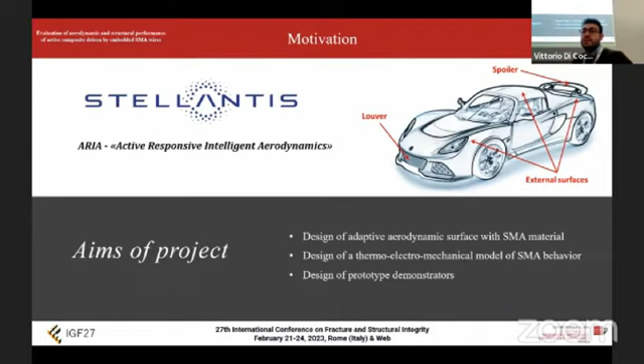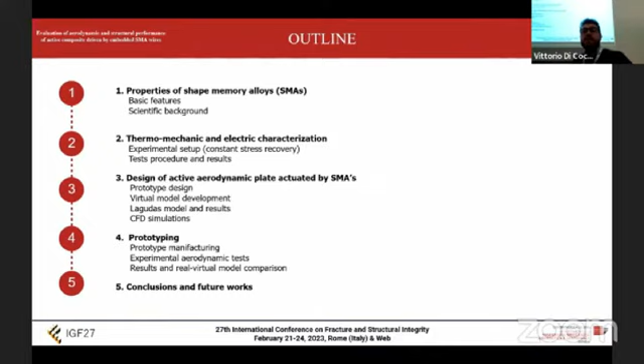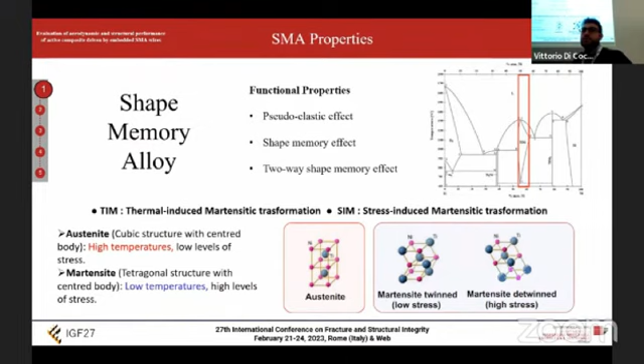In particular, we start talking about the SMA properties and our thermomechanical characterization, the design of our prototype, the test of this prototype, and our conclusion, of course. For the beginning, I want to talk about the functional properties of this particular material. In particular, we can talk about the pseudoelasticity or shape memory effect. We want to use the shape memory effect to realize our prototype, and this effect consists in the recovering of residual deformation preset on this material, in particular on this wire, through thermal activation.

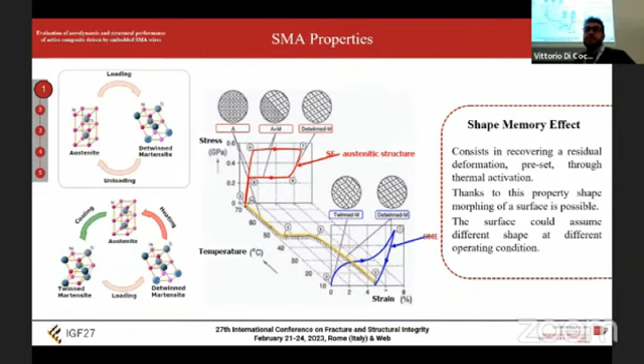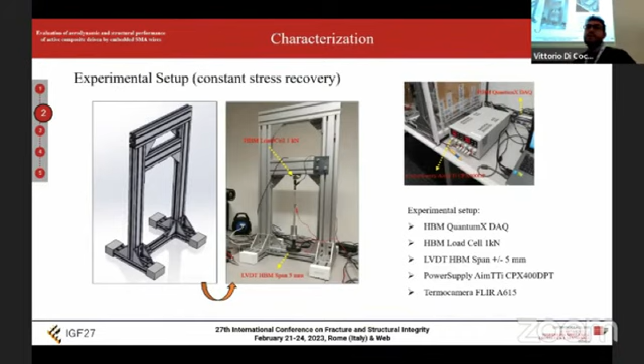As we can see on the graph, the properties of this material are very related to temperature and stress applied. For this reason, we must do some tests to understand how these parameters are related. In particular, we constructed this setup to acquire the load applied on the wire by a hanging mass, a linear transducer to acquire the displacement, and a thermocamera to acquire the temperature on the wire. Thanks to the Joule effect, we can activate this wire and acquire the displacement of this wire. These are thermoelectrical tests.

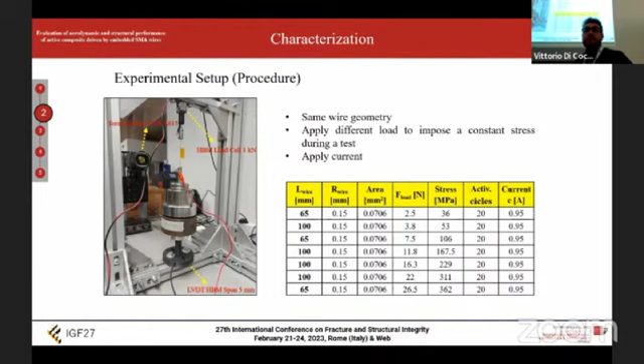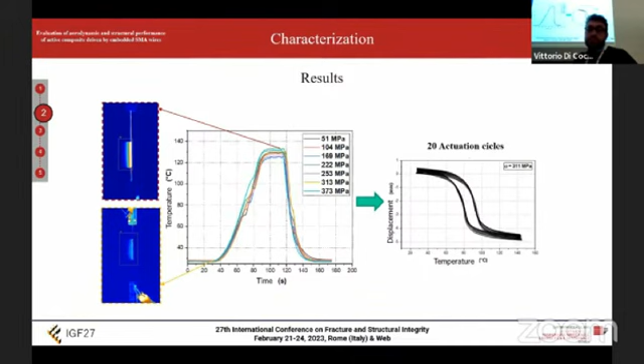Also, we can see after around 20 cycles the characteristics are stabilized, and we acquire the last cycle as shown in the figure. This is the thermal curve, the heating and the cooling curve. And thanks to a tensile test, we can evaluate the mechanical parameters such as the Young's modulus, and we can construct the phase diagram.

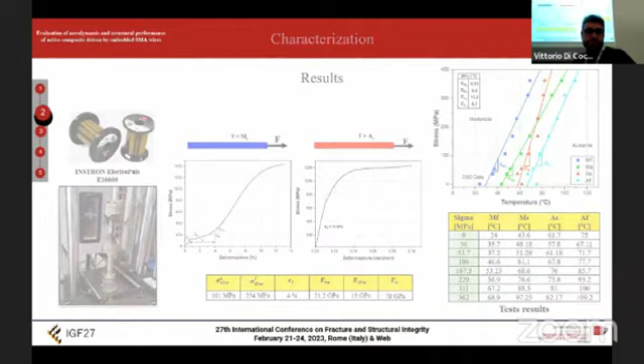Okay, starting from this data, we developed our prototype as shown in the figure. This prototype is made by a plate as an elastic element made of a PC plus PS material, a silicone material to isolate the wire from the environment, and two terminal aluminum end parts to crimp the wire.

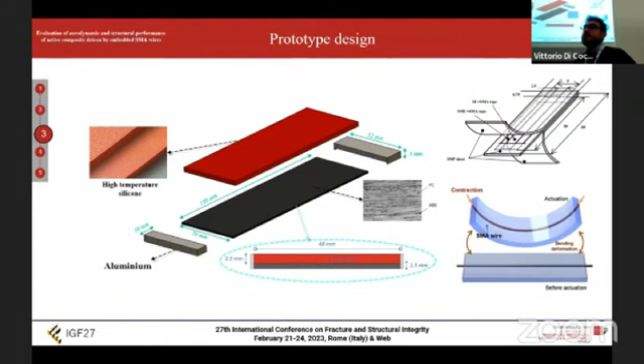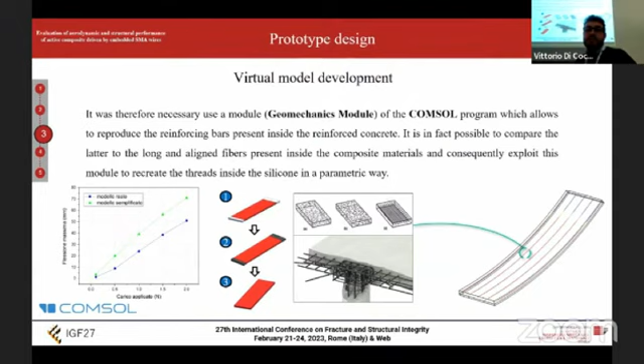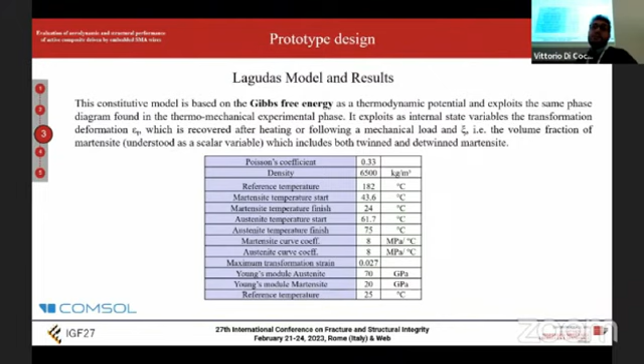Okay, after the design of this element, we carried out some virtual tests thanks to the program COMSOL and the Geomechanics module, in which the SMA wire was treated like a bar inside reinforced concrete. In this software, the SMA behavior is modeled by the Lagoudas model, in which the parameters are the same as the tests before. Okay, we can see our prototype in function, with no load applied.

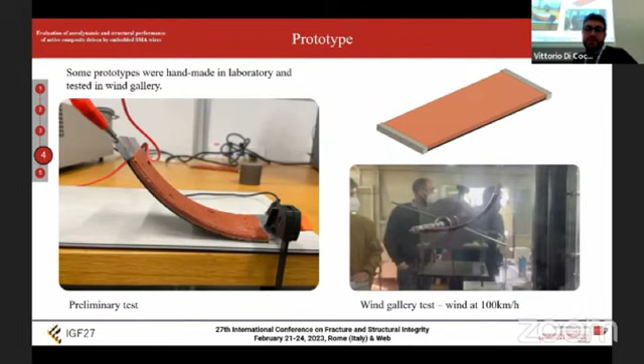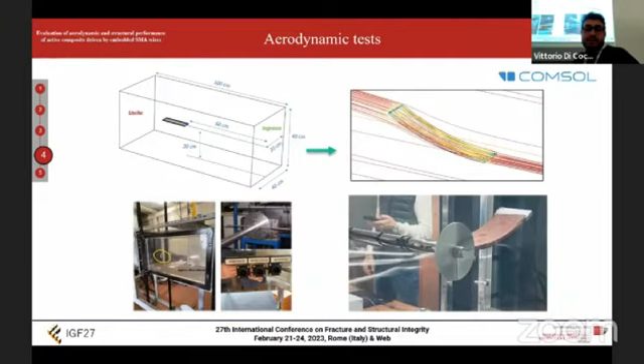And in the second video, we can see how the pressure of the wind affects the plate in terms of vibration and deformation. We can conclude that the pressure and the stress applied on the wire change the shape of this element, and we must compute with coupled physics simulation the effects of the wind. To define the pressure on this plate, we also used COMSOL, and we defined a control volume to simulate the wind tunnel. And this is our test in the wind tunnel.

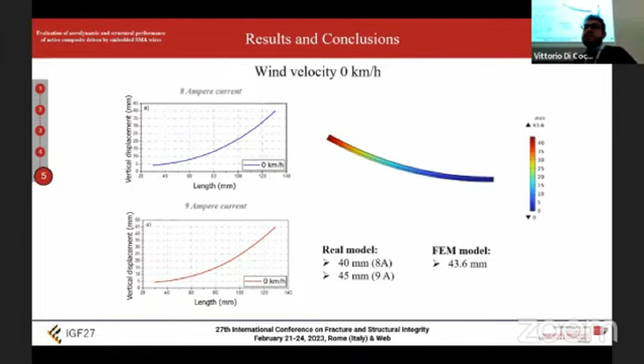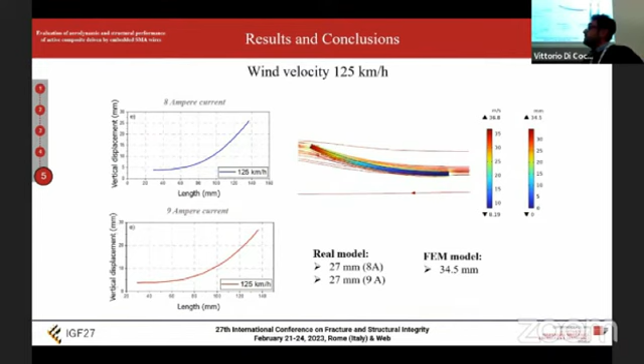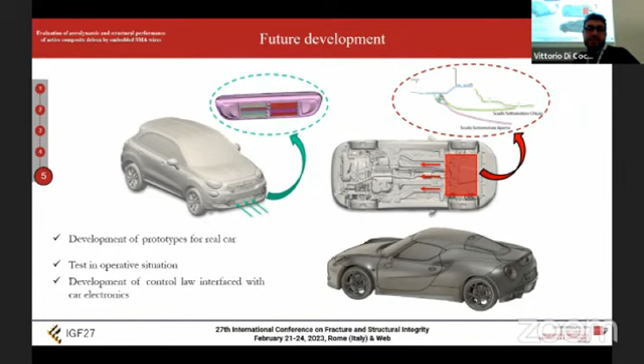In conclusion, we see that the model predicts well the behavior of this element with no load, and for the thermal problem of dissipation, we can improve our model, but the deformation is very similar. For future development, we want to install our device on a vehicle and test it to understand the efficiency.